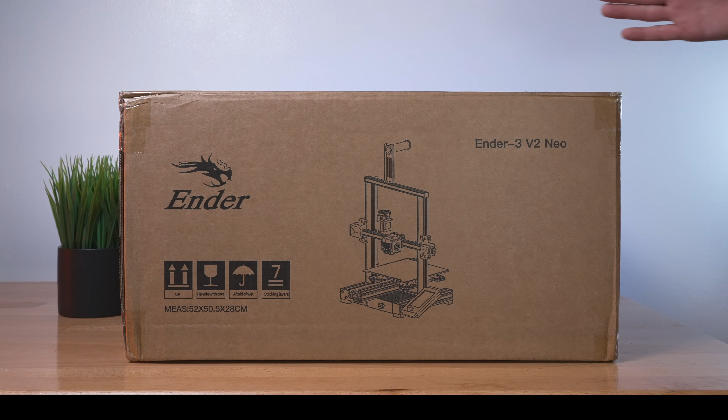Hey guys, today we're going to be checking out a new printer from Creality, the ever so popular Ender-3 version 2, but now in this Neo iteration. Creality's been pumping out new little updates to their existing line, and the Neo version brings all the little upgrades you would want. In this video, we're going to unbox it, set it up, and do some prints. Hope you enjoy it. Let's get started.

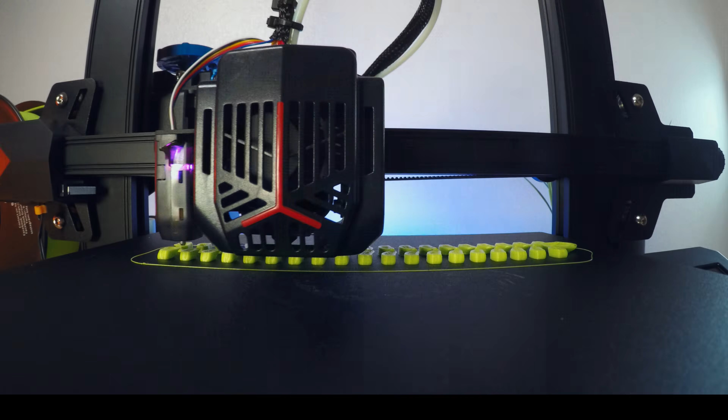Alright guys, I'm pretty excited to check out the Ender-3 version 2 Neo, and I've been a huge Creality fan for a while now, ever since their first Ender-3 printer. So this is the box it comes in. We've got a picture of what the printer looks like, the dimensions of the box, and the shipping label says 8 kilograms, which is about 16-17 pounds. Let's go ahead and open it up.

On the top we can see that it's all packed in this dark soft foam. We've got our documentation, the quick start guide, and some warranty cards, things like that. Everything is packed very well, so I'm just gonna go ahead and pull things out one by one.

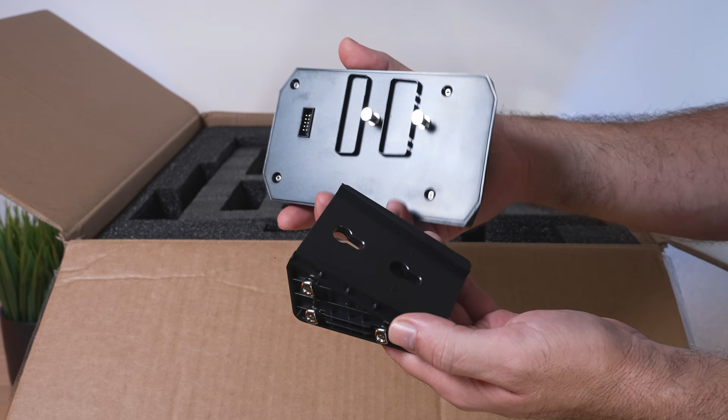The first thing that sticks out here is the screen, and this is the same kind of screen that the Ender-3 version 2 has. It's not a touch screen, it's a rotary kind of operation with a click. We have this bracket that unclicks, and that's how you take the screen on and off, and it plugs in here in the back. I'd like to see smaller bezels in the future, but I think at this point they're just using the design they have and upgrading it slowly.

Here we have a bag of accessories and lots of different things, and we'll go through this in a little bit. We've got our power cable, US type, and a little spatula - it's not sharpened, so these are quite useful to stick between the nozzle and the bed to, you know, maybe get a booger out or something. Alright, so we've got one layer here that comes out.

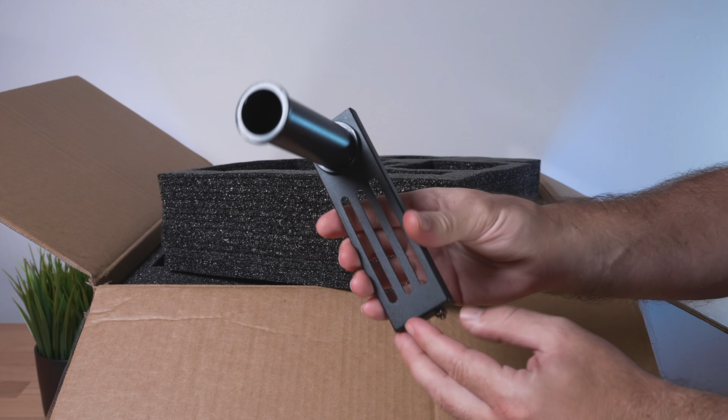Well, actually we do have a spool holder still in there, and yeah, they're just using the old typical spool holder that goes on top. Honestly, I wish they would include the side spool for this one, but the V2 Neo here still comes with this top mounted, pretty simple spool holder.

Alright, so yeah, that's the first little layer there. You probably can't see too well, but everything's nestled very nicely. We've got the gantry here, which is the upper portion, and then the base underneath. This is a pretty simple printer to put together, as we only have a few parts to connect.

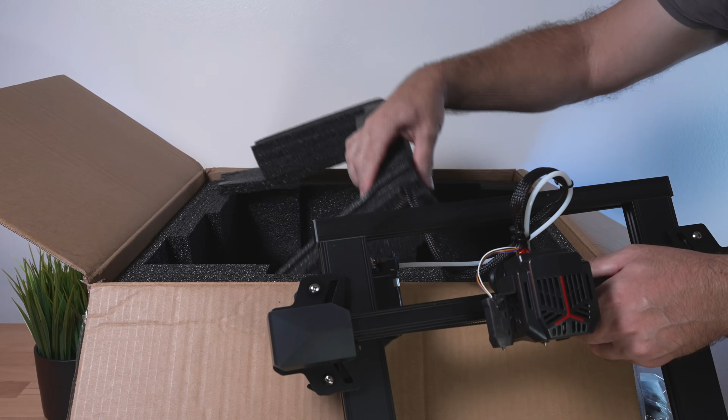I'll go ahead and pull out the gantry, and sure enough, it is tethered to the base, so we'll have to pull them out together. But it does all come out quite easily, so I'm gonna move them out of the way for a second. You guys can see that's everything for the box - very well packed and lots of good protection on all corners.

Alright, I'm gonna go ahead and flip this thing around. On the back here we have the power supply, all nicely shielded. On this side we have a cover where our main board is, and we'll pop these little bolts off and see what's inside. On this side we have a storage bin, which is really nice.

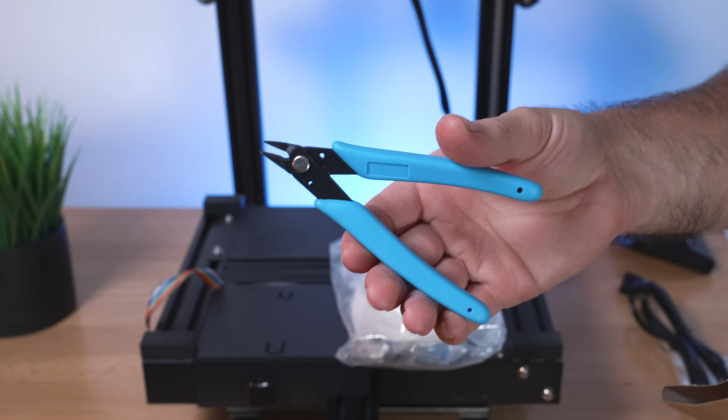Let's go ahead and see what's in this bag. We get some pretty nice snippers, and on the side of this box we have a clean out needle that's taped to it. We get some zip ties, a knob - this is for the extruder, and you guys can see it has a brass insert there, and this is used for indication of flow, and also you can turn it manually, pushing the filament in and out of the extruder.

We also get a coil of filament. It looks like PLA, and I'm not too crazy about these because they're all tangled up, but you know, something to get you started with.

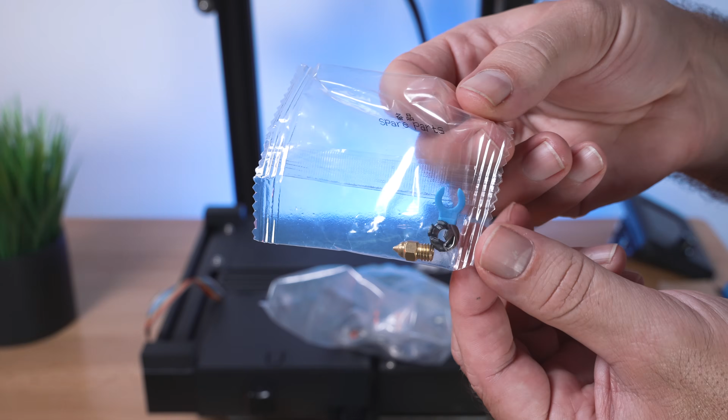4 large bolts, which are used to connect the gantry to the base, and these are M5 45s. We get some spare parts, looks like a 0.4 nozzle, a coupler piece, and also a little clip to hold the PTFE tubing in. You also get a USB adapter to micro SD card, and the little SD card's in it. For the last baggie, we have some tools comprising some Allen wrenches, a couple open-end wrenches, and a flat screwdriver.

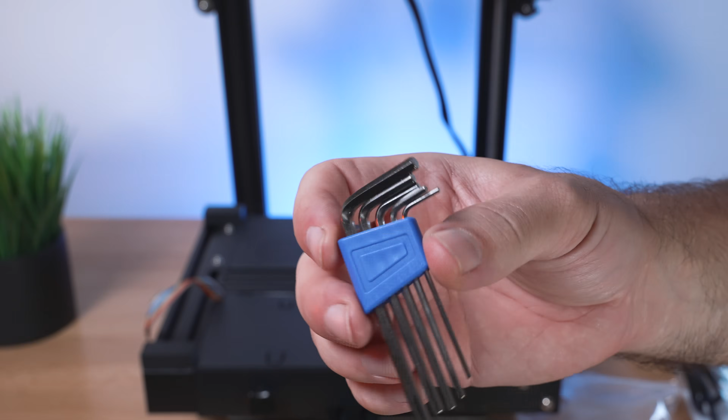So let's go ahead and grab our Allen wrenches, and yeah, really nice how they have them organized like this, not just scattered all over the place - this is a nice little touch. We'll go ahead and undo these 3 under here, and there's one on the other side for this cover, and now it should just pop off. Sure enough, it does, and we do have a fan connected to it.

With our board and everything else underneath, let's take a closer look.

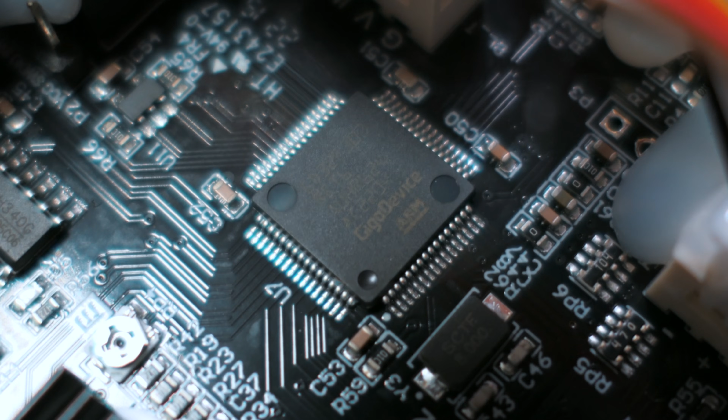So you guys can see we have a Creality version 4.2.2, which is their main board that they use for the Ender. We've got stepper drivers integrated into the board with little heat sinks, and also a 32-bit ARM processor. You can see all the wires are managed and routed out through this cutout here, and there's a protective shield for the wires.

So yeah, pretty typical here for Creality, and everything looks really good. I'm going to put this lid back on, and we'll flip it around and start the assembly. If you guys notice here on each corner of the printer, we've got these really large rubber feet, which will help with noise and vibration.

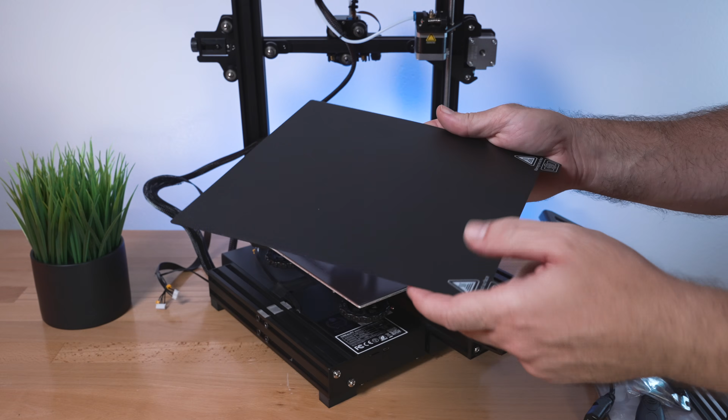All right, so we got it flipped back around. First thing that stands out is this build plate, and it's a flexible sheet, like a thin metal sheet that flexes, and I really like these. This coating here, I think it's called PE, and I prefer this kind of build plate over the normal mats or even the glass beds. I feel like these are much easier and better overall, and there is a magnetic that this magnetizes to, so I'm going to leave this off for now.

As you can see, pretty much the printer is all assembled. All we've got to do is connect this gantry here to the base, and we're going to have these 4 bolts that go through the bottom into the channel.

Let's go ahead and get those out. And they do give you an extra one.

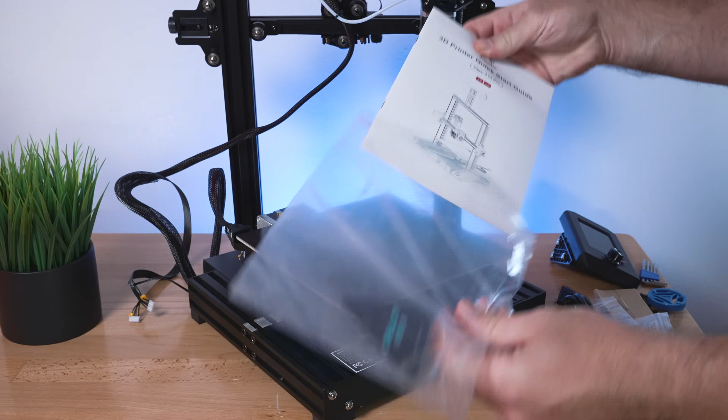So I guess we can go ahead and see what's in this manual. We get a little thank you from Creality, our warranty card, and then the quick start guide, which is a really nice one. We have all the parts that are included with this printer, and the installation is only a couple pages and very simple.

So just connecting the gantry, then the spool holder, and then connecting the wiring. By the way, here's all our parameters for the printer. So yeah, this should be very simple guys. And if you're just getting started with 3D printing, this is going to be great for you because it's quite simple compared to what it used to be like.

Let's go ahead and start putting this thing together. Simple as grabbing the gantry, we're just going to set it over these sides here, and you guys can kind of see it's machined out there, and it's literally going to sit right in that spot.

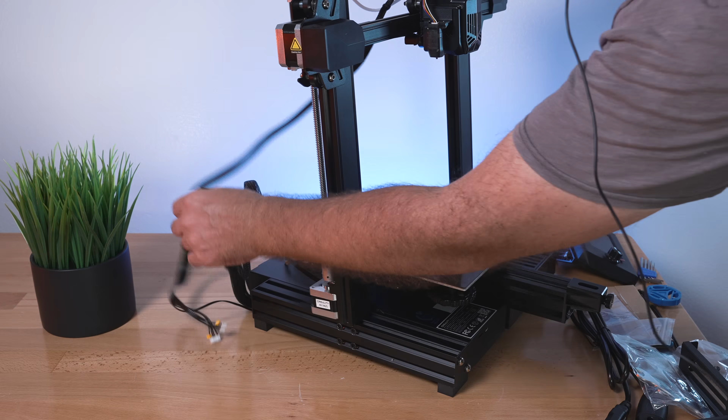Now when you put this down, make sure that your cables here are not tangled and they're happy, so you might have to twist this around to untangle it. Yeah, I think mine's good right there. But yeah, simple as that.

We're going to grab the bolt we need. There's no really easy way of doing this, but we can kind of lift one corner and then put the bolt through there. However you've got to do this, you can put it on its side or maybe off the edge of the table, whatever's easier for you.

Just get these bolts in there, and we're going to use the largest Allen wrench to run them down. Now we're not going to tighten this, I'm just going to get them close, and we're going to do the other side exactly the same way.

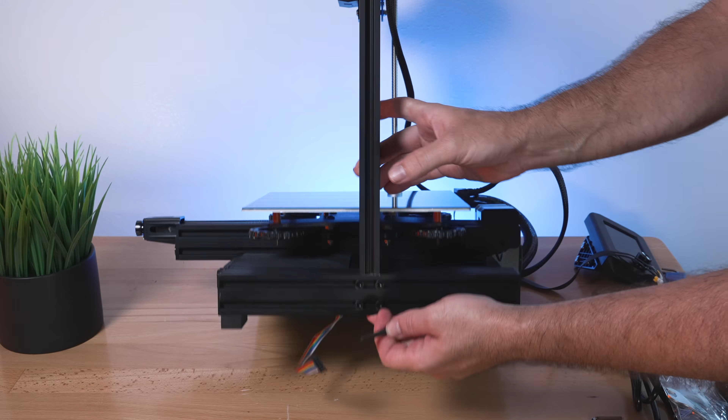Run them down, but we're not going to tighten these either, and the reason for that is quite simple. If we go to the back, you guys can see we have one lead screw here, which connects to our x-axis, and we're going to want to bring that all the way down. The reason for that is because we want the space between these rollers here to be as close as possible on the bottom. Since we are spending most of our time down there, we want to get that part as close as possible, so just go down as much as it goes.

So now we're going to go back underneath and completely tighten these up on both sides. All right, and that's pretty much it.

Another thing you might want to check is if your printer is sitting level on each corner, to see if it's moving around. As you guys can see, mine is nice and solid. If you can see on the side, there's 4 bolts. If yours is wobbling a bit, go ahead and loosen them on each side, let it sit flat, and then tighten them back up.

So I'm going to go ahead and just check mine, make sure they're tight. They're a little loose, but not too bad, which is a good idea to go back and check them anyways, as they do loosen up after they get assembled. Also underneath the printer, we got 4 bolts here. You can go ahead and check those, kind of snug them up. All right, and that feels nice and solid right there.

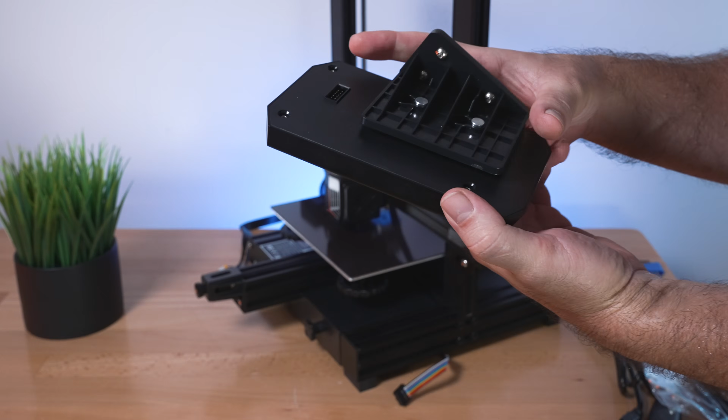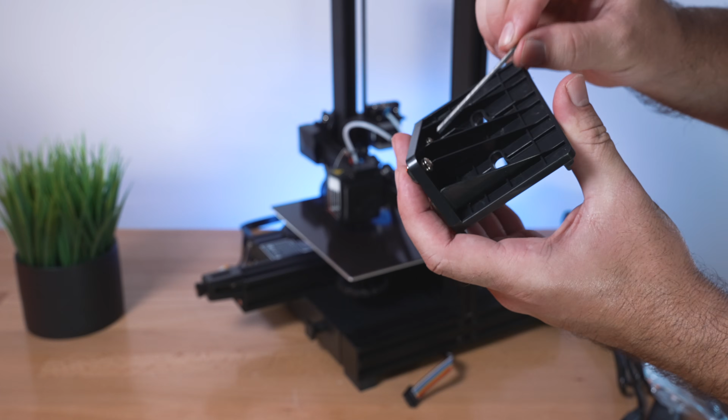So let's go ahead and do the screen next. We can see here there's a wire that comes out from the bottom, and that's gonna plug into our main screen. But before we do that, let's take the bracket off that it connects to. We're gonna be installing the bracket on the channel. There's some T-nuts pre-installed. We're gonna grab the correct wrench and loosen them all, because they're all tight. There's a bolt on one end and a T-nut on the other.

Now that they're all loose, we're gonna line these T-nuts up to the channel. These 2 here go on the bottom channel and this one on the top. Just get them to kind of jump in there. You can install this screen more forward or more back, whatever you want. I'll try to flush it with this fascia. So about right there. With these, you just want to unscrew the bolt and then screw it in, and the T-nut should turn into the channel and lock in.

It's a little hard to show you guys, but it's not very complicated. If you're having trouble, just unscrew the bolt and then screw it back in, and try to make sure the T-nut's lining up center on the groove in the channel. I'm just gonna unscrew it and then screw it in, and it grabbed. We got one more here, a little harder to get to. Just like that, our bracket for the screen is on.

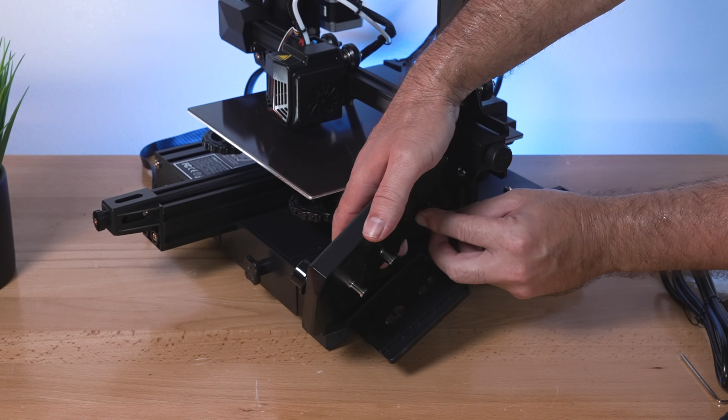Since we're over here, let's go ahead and plug it in on the back, just like that, and then we'll click it in. Now we have our screen installed.

For the next part, we need to install the spool holder, and that goes on top. If you look where our extruder is, that's where the filament goes in, so it has to come from the spool holder down into here. The spool holder mounts closer to the lead screw here.

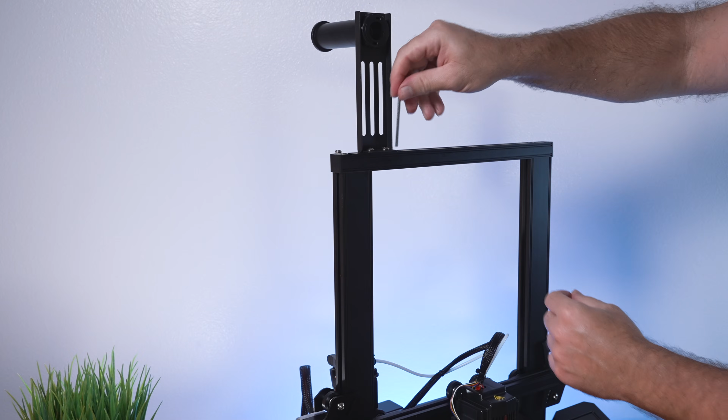We're also working with T-nuts, so let's loosen the bolts. Spool holder going to the back, and I like to go as far as possible to the edge. Same thing here, we're just gonna unscrew it, then screw them in, and the T-nut should turn and lock in. Same thing for this one. And there we go, our spool holder is installed.

The last thing left to do is plug in our wires. We have two larger plugs, which is an X motor and an E for the extruder, and they are labeled with these little yellow tags. Our smaller plug is our X axis end stop switch, which is over here.

Let's go ahead and install the motor plugs. The E will go on the extruder right here, and the X plugs underneath the motor, just like that. Our X axis end stop switch plugs in under here, a little harder to see, but right under there, and that's pretty much done. The last thing we got to plug in is our Z-axis motor, and this wire just comes out here from the bottom, and we'll go ahead and plug it in just like that.

Pretty simple. Now the only issue here is that this wire just kind of falls down, and that's not good, so we need to fasten it right here. There's a little slot on the extruder that we can use a zip tie on. Go through there and then around this wire and zip it up, that way it doesn't fall down onto our bed.

And yeah, simple as that, guys. This part is finished. We can also go ahead and install this knob, which goes right here on top of the extruder, and it has a flat spot where it lines up. So it should just drop in. There we go. Very nice. So you guys can see, you can turn that.

And also it's like a nice little visual there as the extruder runs. And as far as assembly goes, we are pretty much finished with that. But there are some important things that we need to do, and that's to check our rollers and belts. Make sure everything's running smooth and true.

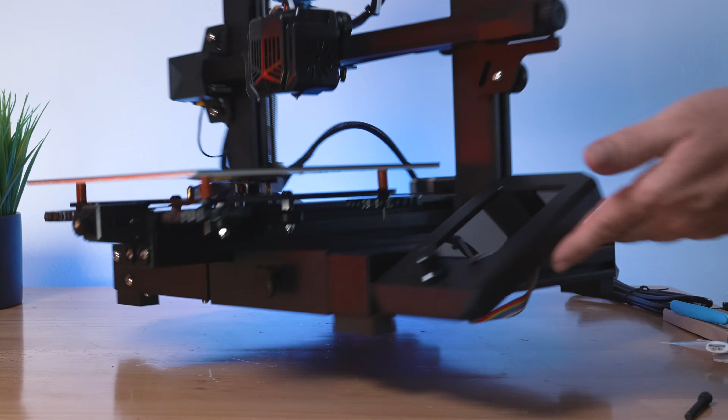All right, so starting here with the bed, what we want to do is check our rollers, and you guys can probably see we got two rollers here, and those are stationary, and the two on this side are adjustable. And so what I like to do is kind of stick my hand in there and turn the rollers. So what you want is a really slight drag, and actually guys, my bed here is pretty much perfect.

And so they include this wrench here that you can turn the adjustable eccentric nut to tighten and loosen the rollers. So I tightened my front one up just a little because it was super loose, and the rear one is perfect. So the point here is you want the bed not to wobble around or have any play, but be as loose as possible on the rollers. That way when it rolls around, it's really smooth. So if you have a really nice smooth back and forth motion, then you should be good.

Now another thing that can contribute to that is the belt. So you can see on the top there's a little look through where you can see how the belt is doing. And also we have an adjustable knob here to tighten it and loosen it. So you want your belt to be looser than tighter, but definitely not too loose, because if it's too loose, it'll have flop. And if your belt is not running true, you can try to loosen these bolts on the bottom here and adjust it. But for this, you'd probably have to shimmy it up and whatnot else, because there's no actual adjustment.

Now, as far as the back is concerned, we can't even see anything here, not even underneath. So in order to see this at all, you just have to take it apart. And there's a little pass through here, which reveals the end stop switch, and even then we can't really see how well the belt is going over that gear. But according to what I can see, it seems fine.

The whole point here is that make sure your bed is really smooth. So I'm gonna put this back on, and we're probably going a little bit in too much detail here, but yeah, adjusting is one of the main things you want to do and spend your time on when you get your printer.

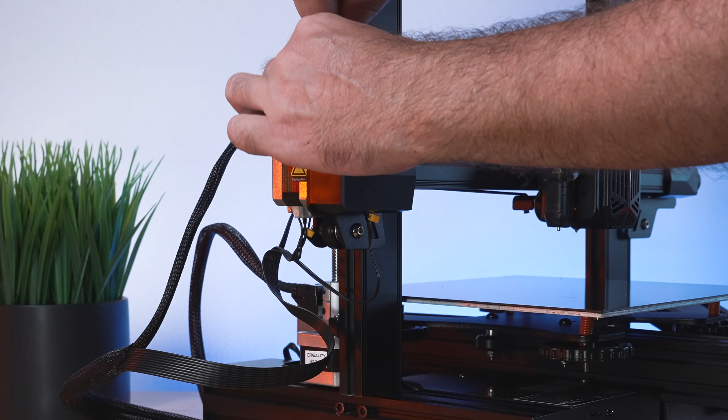And actually guys, on this side, there are a couple bolts that do remove the cover, and maybe we should do that real quick to see.

So there's one on top and one on the bottom, and the whole thing just pops off, and we can see the belt. Sure enough, it's running really true right in the middle of the sprocket, which is good to see. Now we can't see the other side at all, and I don't really see how you can take that on or off, so we're just going to go with the way it is. I think it should be good enough because it feels pretty smooth overall.

Be careful when you tighten it with these knobs, as you can't really feel how much tightness you have, so you kind of have to pull on the belt when you adjust that. All right, let's put this cover back on, and we're good with the x-axis.

Now there is one more thing you could adjust, and that's these wheels here. On mine, they're a little bit on the tight side, so we can go ahead and loosen them up just a bit. The adjustable eccentric nuts are on the inside here. We'll start with this one, and we loosened it up just a tiny bit.

You want to keep these tighter than looser, because the Z goes up and down really slow, so there's not too much movement going on, so it's okay if they're a bit tighter. Now what you don't want is for it to be too loose, where on this side you can bounce around—which we're not, it's nice and tight. Because we only have one Z-axis lead screw, this side is more vulnerable to movement, so for this printer it's better to be tighter than looser.

Yeah, we are pretty loose, and you guys can see our Z-axis moves really good, and I can just push it up and down. This is usually a great indicator that everything's adjusted well, it's all aligned, and nothing's binding.

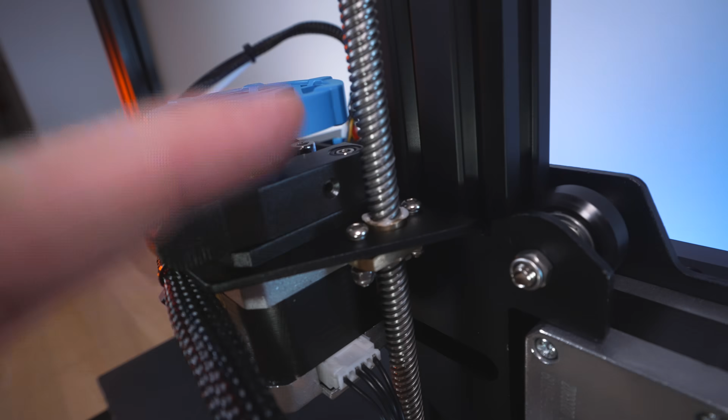This is our x-axis motor, and that's where it plugs in. The brass bushings, we grease the lead screw. Going down, we got the coupler with the motor for the z-axis. On the other side here, there's not too much, just the rollers, and then our adjustable knob here for the belt tension.

The frame is all metal everywhere, so that's nice to see. Going down to the bottom, we can see our cable that comes out from the bed, and it is strain relieved nicely, and all the wires are on these braided protectors. Very nice. Also, we can see all the channels have end caps and our large rubber feet on 4 corners.

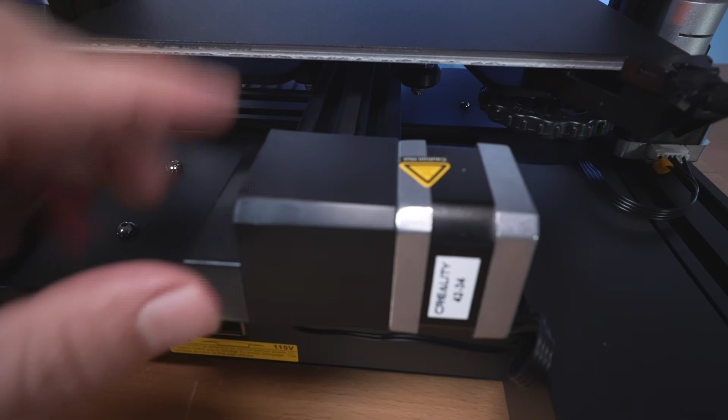On the very back here, kind of sticking out, we have the power input port. It is fused with an on and off switch. This is our y-axis motor, and it's all covered up here. The belt, the end stop switch is right on top here, and all these wires here are already pre-connected.

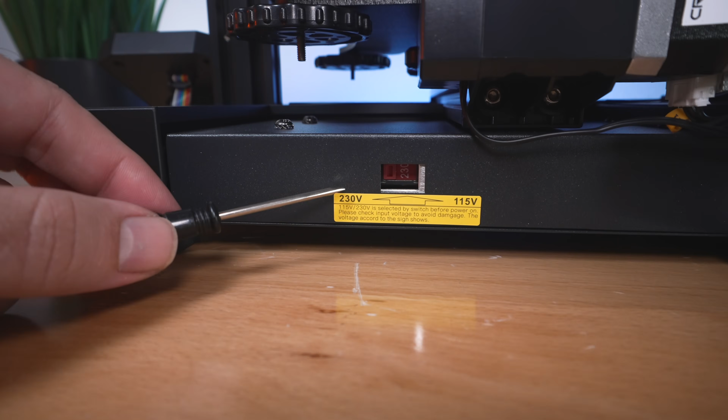And probably the more important thing is back here, which is the power voltage switch from 230 to 115. So depending on where you live, you want to switch yours to the correct voltage. Mine's on 230, but I need to go to 115. So let's grab our little flat screwdriver and switch that over to the 115 voltage.

And you guys definitely don't want to forget about this, as it's quite important. If you have it on the wrong voltage, you could damage your printer. So yeah, I like the overall design. Very low profile here on the power supply. Nice end caps, just looks really good and well built.

And going up from here, we can see the back of our hot end, and you guys can kind of see that we have a silicone sock over the heat block, and that's our tip there, and the CR touch over there. Going back to the front on our hot end assembly, we can see the wires that come in. We got a PTFE tubing going from the extruder to the hot end, and this wiring here, then our main wiring for all the cables.

And you guys can see we do have a clip in there on the coupler for the PTFE tubing, and we also got a wire here that comes out to our CR touch for the auto bed leveling.

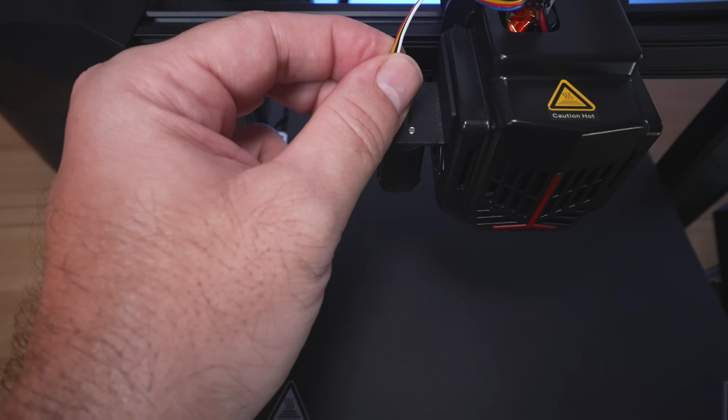So the cover on the hot end is quite interesting looking. We got this red accent, it is all plastic, and we've got a lot of vents for cooling. So this is our parts cooling fan under here. It is a vertical blower duct coming out there on the bottom, blowing right under the tip. Our heat break fan is inside there, and it's actually quite large.

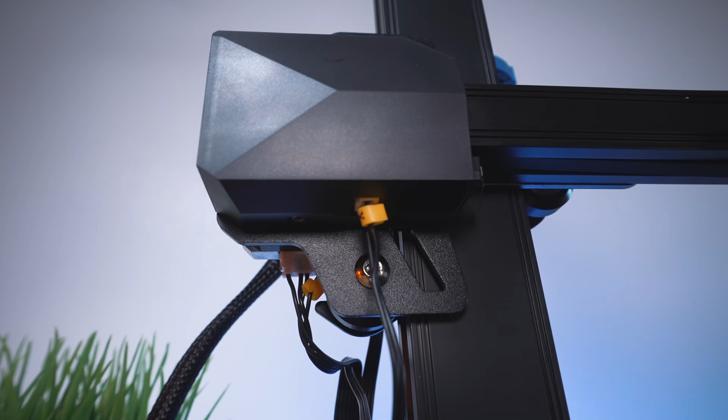And then on this side, we have the CR touch. So going to here, you guys can see that this cover here is all covered up, and we took it off earlier. Our end stop plug plugs underneath, and that's the switch here. So it looks pretty nice. And on the other side, we have the adjustment for the belt here, also completely covered. But a very nice clean design.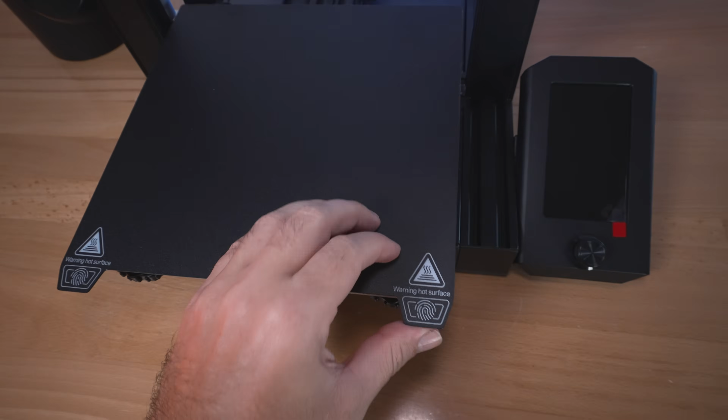Going down to the bed, I really like this sheet that they included that's flexible and it's magnetic. This makes it a lot more enjoyable to 3D print, as when you're done, you can just pull it off, flex the build plate, and the model will pop off. Plus, you don't have to wait for the build platform to cool off. Right when you're done, you can take it off, set it on the table, and it'll cool off really quick compared

to like a glass bed. So yeah, very happy to see this. Hopefully it works great and the prints will stick and pop off easily.

So going down from there, you guys can see we have the magnetic sheet under that, and then the aluminum part, which is the heated platform, and the elements are underneath, so it is not insulated. But for this size bed, it's not that big of a deal.

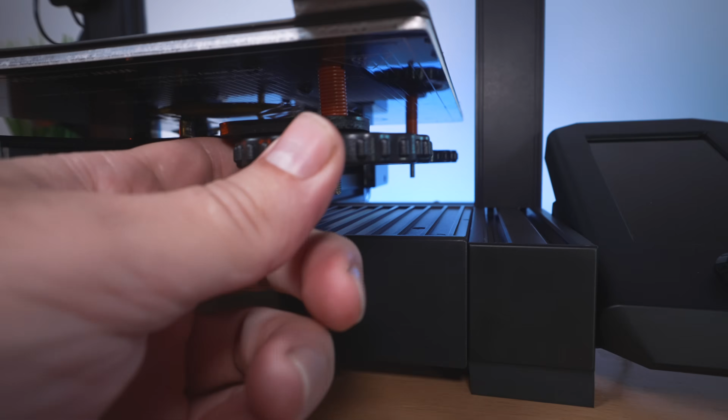We got the frame, pretty thick, quality orange springs, adjustable knobs here to level out the build plate. There you guys can see our adjustable eccentric nuts on this side for the rollers on the bed, and then the other side is stationary.

The Y belt, and they do have a cutout here so you can see the roller, and this is where we tension it. Over here we have some kind of official Creality Better Filament Plan sticker, QR code, and the parameters of the printer.

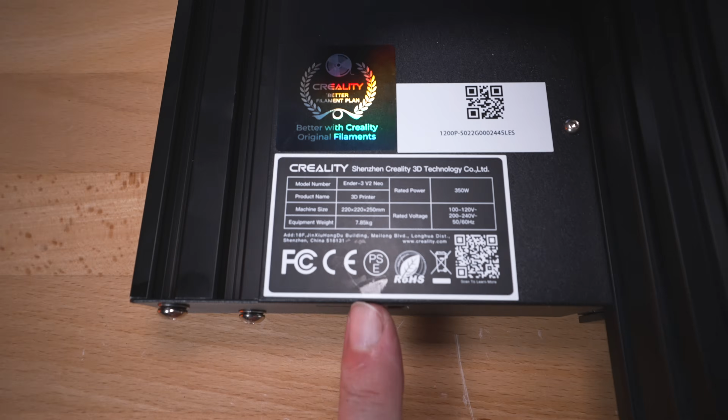Right below that we have a couple ports, one for the micro SD card, and the other one is a micro USB plug if you wanted to connect to your computer.

Very nice clean design. Going this way, one of my favorite parts of the printer is this really large storage box. It completely pulls out and has a little hidden piece here that separates from the main one, goes underneath the channel. So this is great, and it clips in there, very useful. Really like that. And as we go from here, we can see our display with the rotary knob.

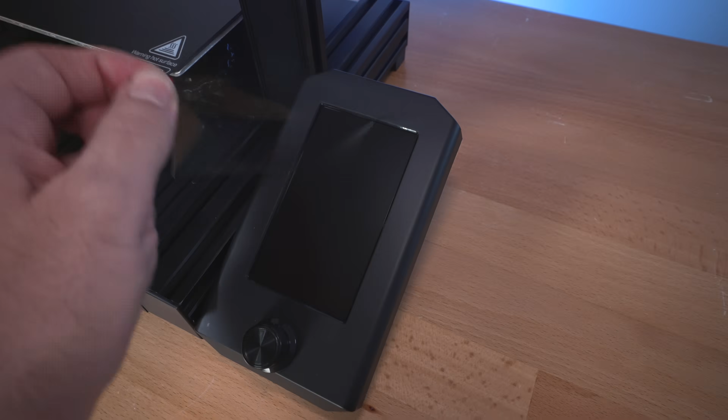Let's go ahead and peel this protector layer. Underneath here, you guys can see this is how we mounted it. Plugs in here, cable comes from the bottom, and not too much more to see on this side. And on the other side, also not too much to see here.

But yeah, overall a really nice looking printer. The only thing I wish is that the spool holder would be on the side, but you could upgrade to that, or even do a little mod where you take this off here and print out a little bracket that hooks up to the side, and the spool will kind of go to the side there. So other than that, very well built printer, and I'm pretty excited to power it on.

All right, so I went ahead and plugged the printer in. Let's go ahead and hit the power button. And it does power up. You guys see it actually boots up real quick.

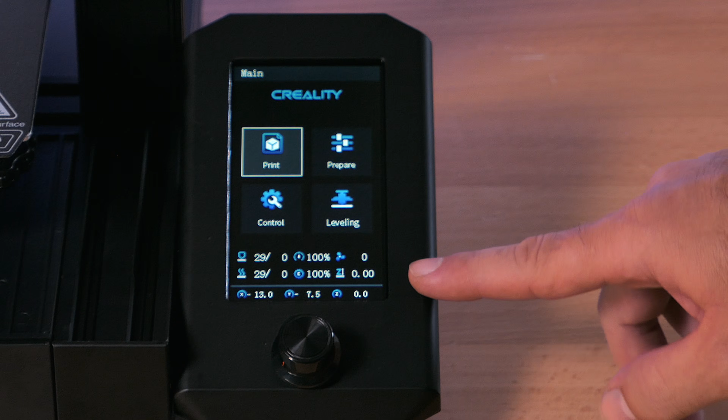So as far as the UI, it looks pretty similar. I don't really see any difference at this point. We got print, prepare, control, and leveling. And then down here we have all of our constant information about the different parameters.

So let's go ahead and click on prepare, and we'll click on preheat PLA. So it's going to go 200 on the nozzle and 60 on the bed. It all appears to be working there.

Also let's go to auto home and make sure everything works with our motors and end stop switches. So click that. The X is good, the Y is good, and you guys can see our CR touch there, probing the bed.

All right, so everything works, and our bed is getting hot, and our nozzle is already at 170. Pretty impressive how quick the bed heats up, even though it doesn't have insulation.

So the first thing we want to do is level our bed. Because this printer does have adjustable springs here, we need to go ahead and level the platform out first. Unfortunately, Creality doesn't have a way to make this more simple than it is.

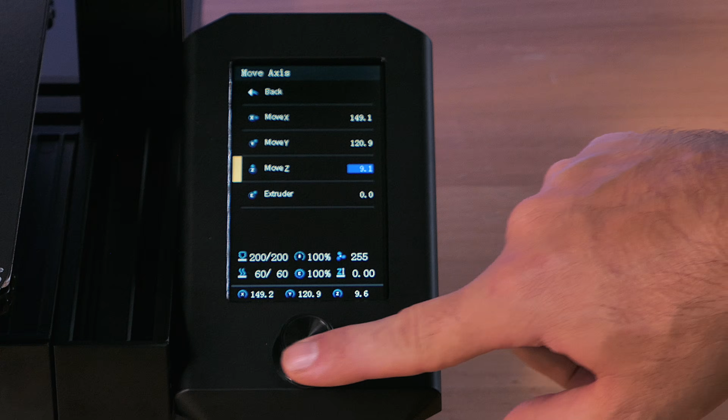So what we need to do is go to prepare and then auto home, which we did, but if you have to, auto home again. And if you guys notice, it kind of raises up, so we're off the build plate quite a bit. So we need to go to move axis, and if we look here, we are 10 millimeters too high, so we have to lower that to 0. This is the confusing part, because if you don't do this, you're not going to be leveling it correctly.

So once you're at 0, now we can start the leveling process. But before we can do that, all our steppers are locked, so we need to disable the stepper motors, which we'll click here, and that's going to let us move it around.

Now, the only thing about this is that you're going to have to be very careful not to push down on this, and you guys saw how easy it goes down. So this is a little bit tricky. Try not to put any force down, only side to side there.

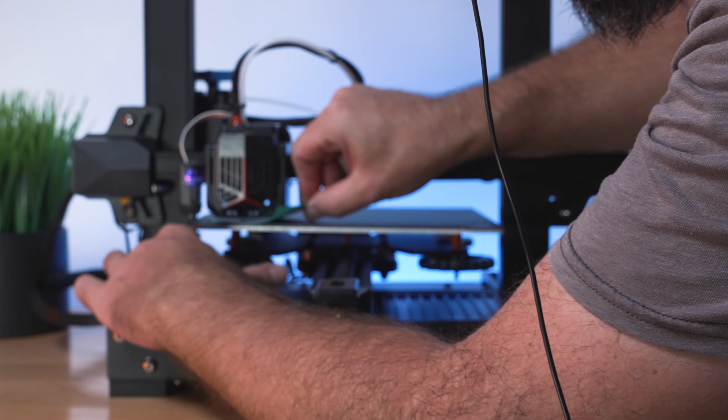And then we're moving our bed also. So let's go to this first corner here. All right, and we'll go around. For now, it looks like I just need to go up mostly on the 4 corners. All right, so back to the front corner here.

Now we're going to be adjusting a little more precise. You want to go around at least 3 times or so and get it pretty close, because as you adjust one, the others kind of change. All right, so I am pretty close now. As long as you get it close, you should be good enough. Then we're going to click on this level button, and that's going to initiate the auto leveling.

And our bed leveling is complete. You guys saw the nozzle lowers down to where it needs to be. And now what we can do is set our Z-axis offset.

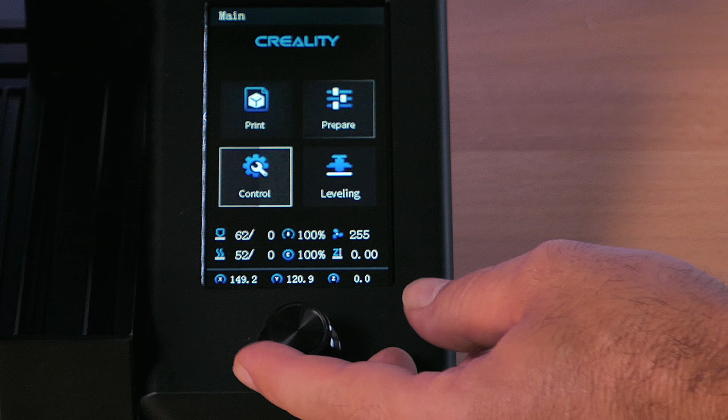So if we go to prepare, and go Z offset, here we can adjust. I gotta go down, so I'm going into the negative until our nozzle has some friction between the paper and the bed. There we go. So I'm starting to see some friction here. So I need to go back up. All right, so it looks like about minus 2.70.

And you can adjust this when you start printing up or down. But yeah, this offset is going to be universal for this hot end setup. So no matter how you change the build platform, level it up or down, it'll always be minus 2.70. So yeah, because of the CR touch here, it goes off of that. And that pretty much concludes our bed leveling.

So let's go ahead and auto home it again. And we're pretty much ready to print. But before we do that, let's go ahead and preheat the printer again. Looks like it turned that off.

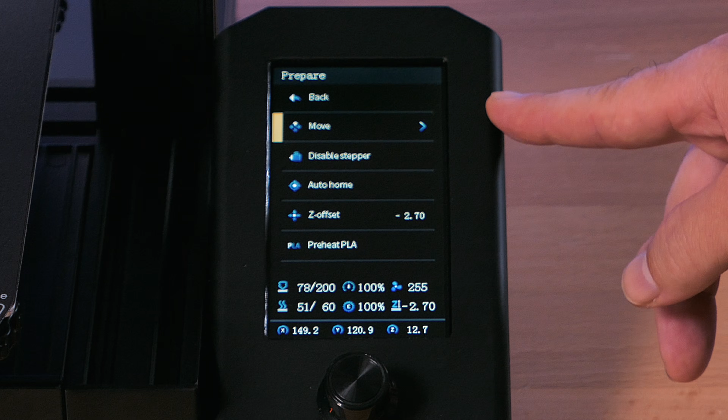So preheat PLA. Yeah, the menu is quite simple, guys. We have print here, that's going to read the SD card. Prepare is where all of our useful functions are, like move, disable steppers, auto home, Z-axis offset, preheat PLA, preheat ABS, and cool down.

Go back. Control is going to be our temperature control, motion control, configuration, store configuration, read configuration, and reset configuration, and info about the printer. And then our last one here is the auto bed leveling.

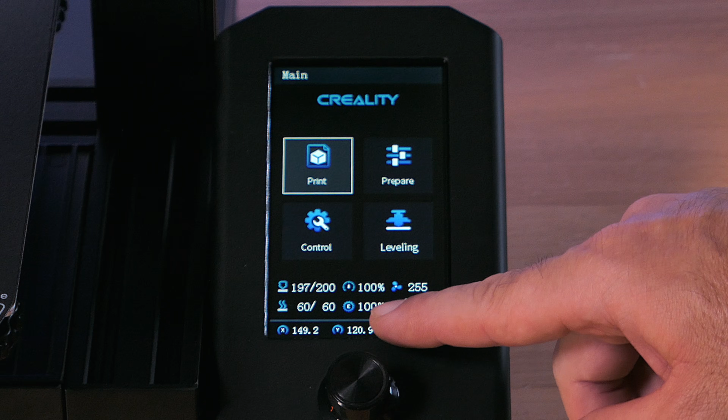So yeah, it's pretty simple overall. And down here we have dedicated information. We got the hot end temperature and the target, the bed temperature target, the flow rate, the extruder rate, fan speed, Z-axis, and on the very bottom we have the X, Y, and Z positions.

So let's go ahead and put in some filament, cut it at an angle so it's easier to feed. And it's gonna go up here on the spool holder, and then from there down through the extruder inlet there, hopefully you guys can see, and we're gonna just press on this knob to release it, and then kind of go into the teeth, and then once we go there we can use this knob to push it through. But yeah, we're literally pushing the filament through the PTFE tubing and then out the hot end.

And we'll go ahead and purge that. So we got red coming out, perfect.

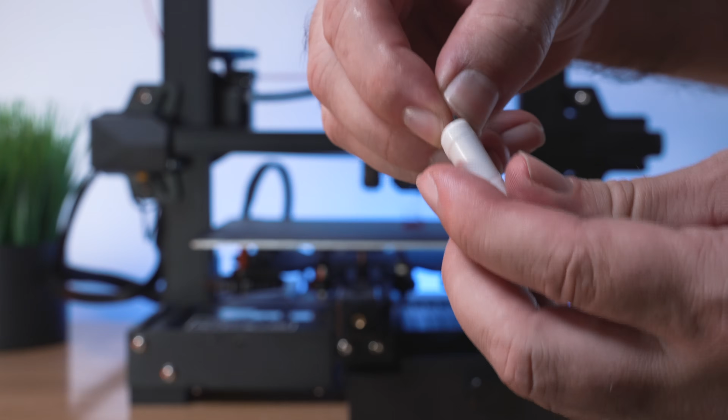So let's grab our micro SD card. And by the way, it is at 8 gig and it plugs in right here upside down. So now we can go and click on print, and we can see that we have a couple test prints included with the printer. So let's go ahead and start with this tuzi one.

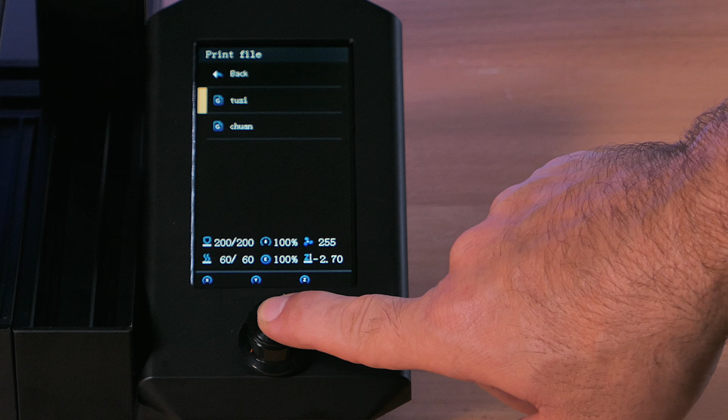Go ahead and move this boogers out of the way. Start. And sure enough, we can see a preview here of what our print looks like. And I think this is the new part of the UI that it's able to show you what you're printing. Well, that's pretty cool. So let's confirm.

And it starts. So unfortunately, it doesn't show you the actual preview while you're printing, just initially when you first start.

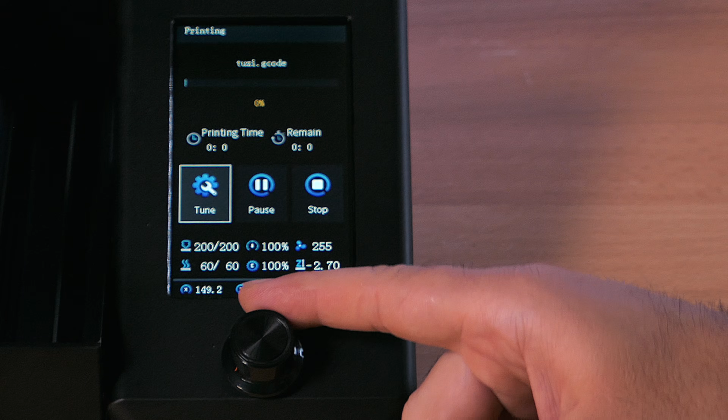Got some filament there. But yeah, let's hope our offset is good. And we can go to tune and Z-axis offset just in case we need to adjust it up or down. But it appears that we don't need to do anything because it's perfectly between the nozzle and the bed.

All right, well, that's pretty impressive, but I think it does need to go up just a little bit. It seems like a little too close, so I'm gonna go up. Okay, yeah, that feels a little better, but yeah, we're pretty much perfect off the build plate.

And as we do print, we do have a different menu here. So on the top, it shows us the file we're printing, the progress bar, it's at 0 right now. How much time passed since we started, 1 minute. Remaining and still calculating.

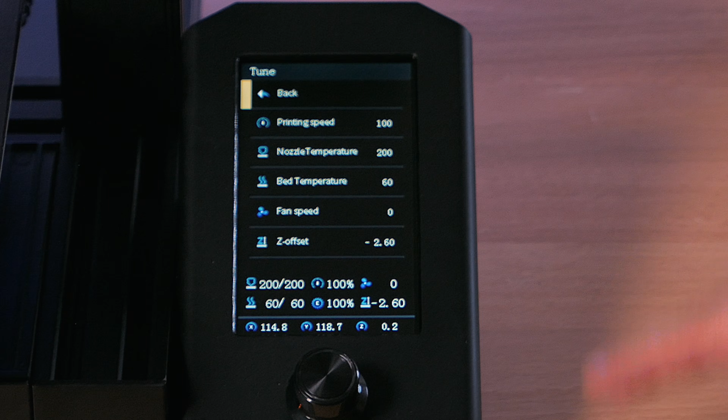And then we got hot buttons, tune, pause, and stop. So in tune, we can adjust our printing speed, our nozzle temperature, our bed temperature, the fan speed, and the Z-axis offset. And obviously you can pause and stop the printer if you want to. And down here we got all our general information that always stays down here. So yeah, very nicely laid out and easy to understand.

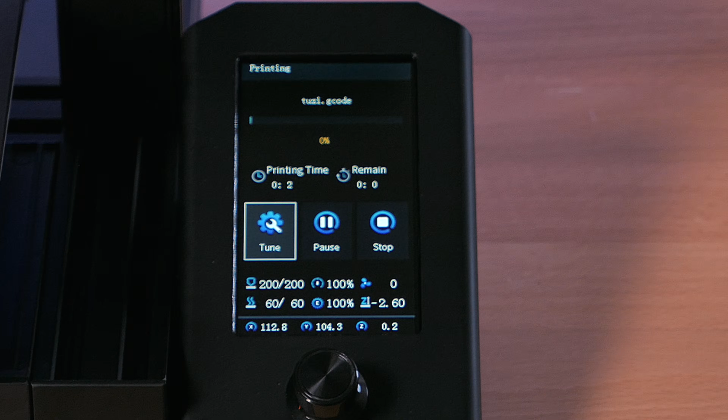So the printer is ultra quiet. I'm going to bring my microphone in. No motor sounds at all, and the fans are actually on the quieter side.

So yeah, so far everything is looking really good. And it looks like our tuzi is sticking to the build plate, no problem. And we're 4 minutes in, going up and up on the layers.

Alright, so we went ahead and printed out both of the models that were included with the printer, and I went ahead and changed the filament to blue after the rabbit there. So the other print, as you guys can see, was a little benchy.

Now if you look at the screen here, it's pretty darkened and it has an auto dim feature, so if we just touch the knob here, it'll come back to life. And so for the benchy, it only took 1 hour and 46 minutes, and we can just click on confirm and it'll go back to the main menu.

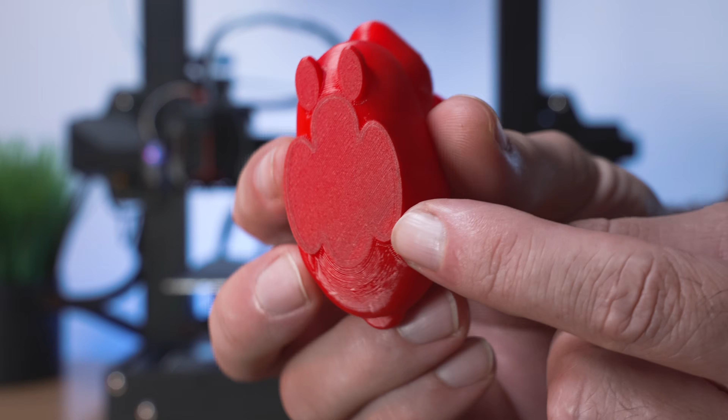And by the way, this is what the bottom looks like. It appears that we didn't purge it enough. We got some kind of darker color there, I guess from factory testing. But yeah, looking good, and the bed stuck really well.

And speaking about that, the benchy is still stuck on there, and the bed is completely cold. I like how they have 2 tabs on each side, so you can choose any corner to pry it up with. So let's see what happens.

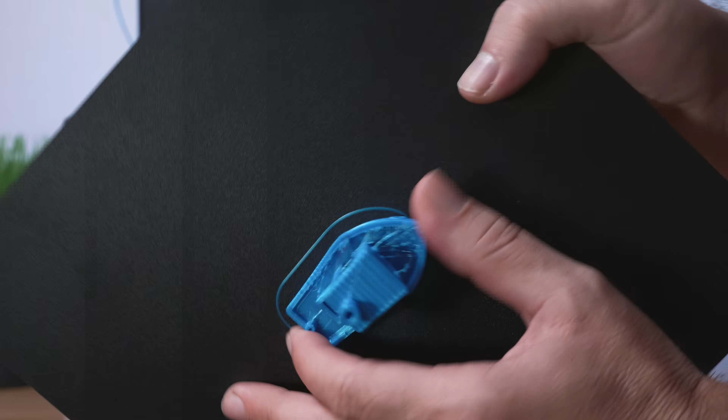Okay, so it's still stuck on there, which is cool because that just tells us that the texture here grabs the filament very well. All we gotta do is flex it, and the benchy does want to come off. So yeah, very easy. So far this thing is performing excellent.

And also on the sheet, I noticed when you put it down, you can actually still move it around by just pushing on the corners. It does magnetize, but not enough where you can't move it.

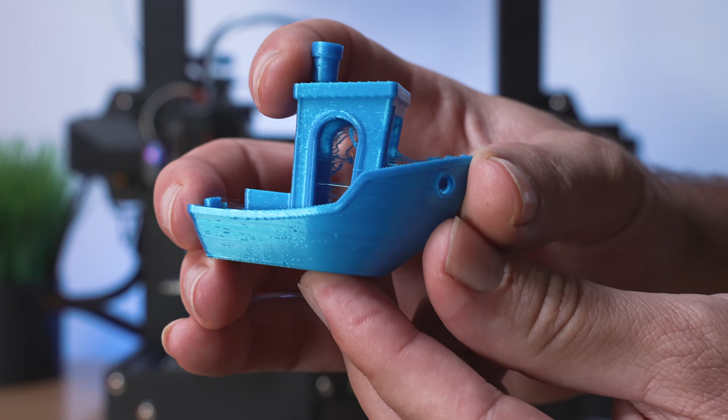Now the benchy is a different story here, guys. This doesn't appear to be sliced very well, or we had other issues, I'm not too sure. It looks like maybe just bad slicing and possibly not good filament either, maybe. But you can see that there's a little bit of under extrusion here and there. The layers are uneven, and actually we do have some miscoloring, so this could be because of the filament. I'm not too sure, honestly, what to think about this thing.

Yeah, and lots of stringing for some reason. So not a really good benchy, but we didn't slice this print, so it's kind of hard to judge it since we don't know what the parameters of the slice are. So I think what would be better is if we sliced our own benchy, and maybe also a calibration cube.

So let's go ahead and do that. Alright, so we got the SD card plugged into the computer. Let's go ahead and open it up. So we have the 2 G-codes that were included, and also this RAR file, which is made for Windows.

And I'm on Mac, I don't think that's gonna work. Yeah, it's not even gonna work, so I can't even unpack it here on my computer. So I wish they didn't do that. I guess we can't really see what's in there, but most likely there's a manual, a slicer, and things like that. So not a problem.

So let's go ahead and open our Cura slicer, and this is what I normally use, and we'll go ahead and build a profile from scratch. So we're gonna click Add Printer, Non-Network Printers, find Creality, go to Ender-3, and we can rename it here. So we'll call it V2 Neo. Delete the Creality word so it's not so long. So we'll click Add, and these are all our parameters, which should be fine.

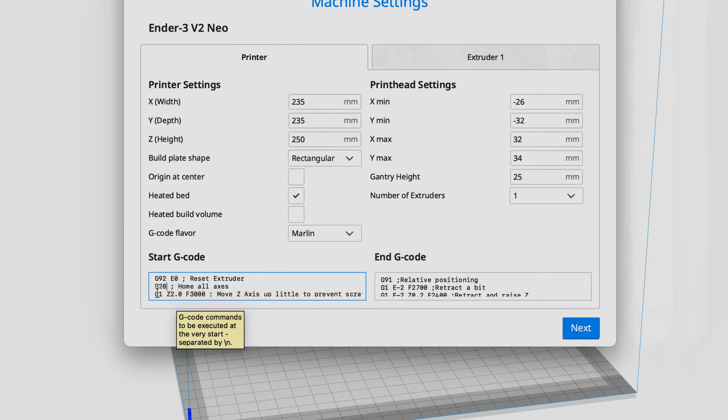So over here where it says G28, we can add G29 to home all axes since we have the CR Touch, and everything looks good here. So let's click Next, and right away here we can see the whole build volume.

Let's go ahead and throw in a Benchy. If we click on it, we can see a little menu pops up here on the side with some arrows. You can drag it, and this is the move tool - I'm just gonna push it back a little bit. So we got move, scale, and you can do it here by entering millimeters or percentage, or you can just drag these things here. And then we also have rotate.

So the more important parameters are here on top, and this is our print settings. First thing you want to do is click on these little dots right here and choose advanced. I'm gonna go through this real quick of how I change mine.

So this is our layer height, and you can change this up or down. Everything should be good there.

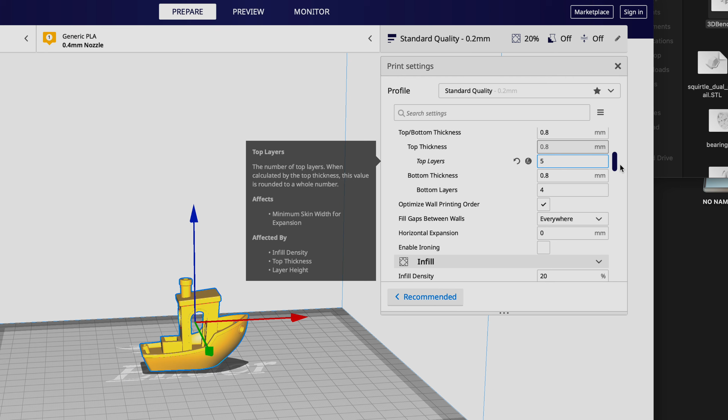Let's go down to shell. I'm gonna change the wall count from 2 to 3 - that makes the walls a lot nicer. And we'll also do the top layers from 4 to 5, which helps fill in the gaps on the top. So here we have fill gaps between walls - usually that's turned on, so you can turn that off to print faster, and you'll be able to see where the gaps are. Infill density at 20 is good.

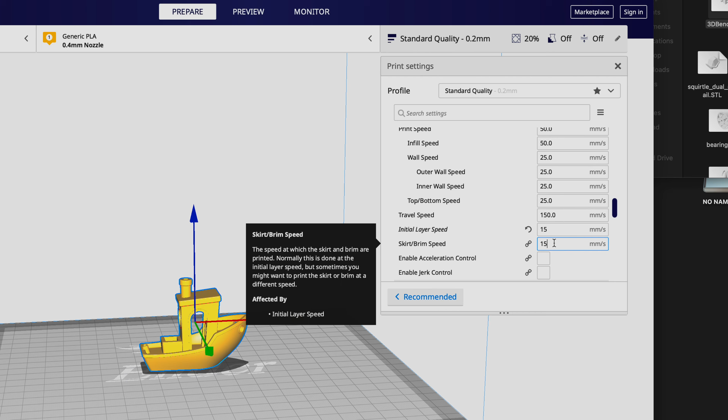Temperature 200 is good, but the build plate we want to turn to 60. For print speed, normally I use 50 for all my testing. The only thing I change is the initial layer to 15 and the brim and skirt to 15. We're going to enable retractions and change that to 6 millimeters and the retraction speed to 25. The rest should be good here.

So over here we have generate support. If you have a model that you want to put supports on, you can do all the parameters here.

Build plate adhesion - I like skirt because that prints straight to the build plate. Brim just touches the model and extends in one layer to help it stick. And then raft completely builds a raft underneath the model and prints the model on top. So this is if you're having a lot of trouble sticking, this could help, but it wastes a lot of time and material.

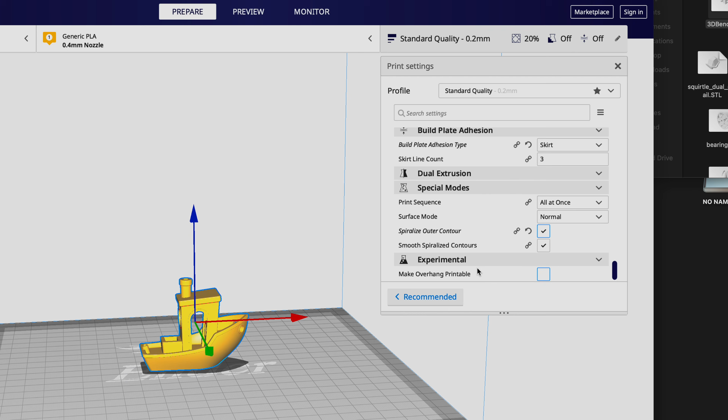Skirt is my preferred setting here, and it's just going to print 3 lines around the print and then print the print itself. We also have spiralized outer contour here - we will try this out for this printer and see how it does, but the way this works, it just prints a few layers on the bottom and then one layer all the way around. So this is good for vases or larger, simpler items that can print with one layer. So we'll uncheck that, simple as that, guys.

That's pretty much it. Now there is actually one more thing that I forgot. If we click on these dots and go to expert, in the travel section where your retractions are, it says retract before outer wall. I like to uncheck this as it does make the walls a lot nicer, especially where there's a lot of retractions needed. So you can try this out also and see if it helps your prints.

I'm going to set this back to advanced so we're not confused, and we should be good to go. So all we're going to do is click slice down here. It's telling us it's going to take 2 hours and 5 minutes to print this.

And since we got our SD card plugged in, we can go ahead and just save it straight to the removable drive. It saves here, and you can eject it and print it out.

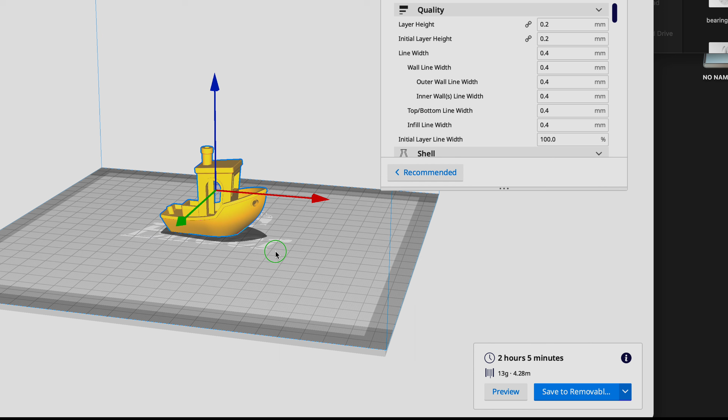But I'm going to go ahead, right click and clear the build plate and throw in a calibration cube, push it back a little bit and slice it the same way. This is going to take 37 minutes, and we'll go ahead and save this to the SD card, and now we can just eject it.

But before we do, you guys can see we got the 2 new files that we just threw in here. Pretty cool and simple, and hopefully guys, this little quick overview here helps you out.

Alright, so the benchy and the calibration cube printed out, and I have to say guys, they look really good. Now I also printed something else here, and we'll talk about that after these two. So let's go ahead and look at the calibration cube.

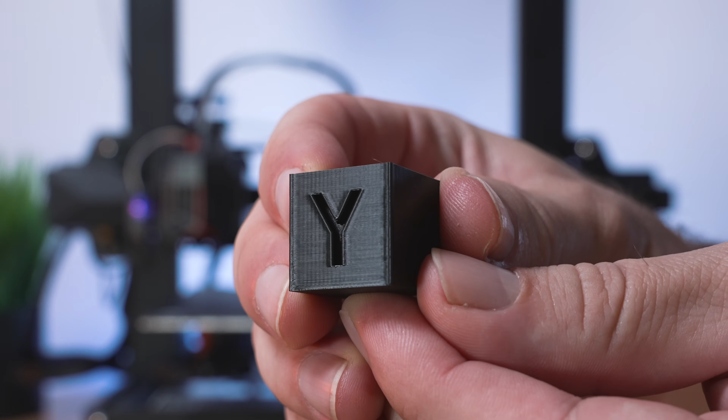So here we have the X, and you guys can see that is really clean. Trying to get you guys some different lightings. But if you see those lines, that's just the lighting, the print itself is super smooth. Practically no ghosting or any artifacts. Very nice. Here we have the Y. A little bit of vibrations and very minor ghosting. Nothing weird or bad, so looks excellent.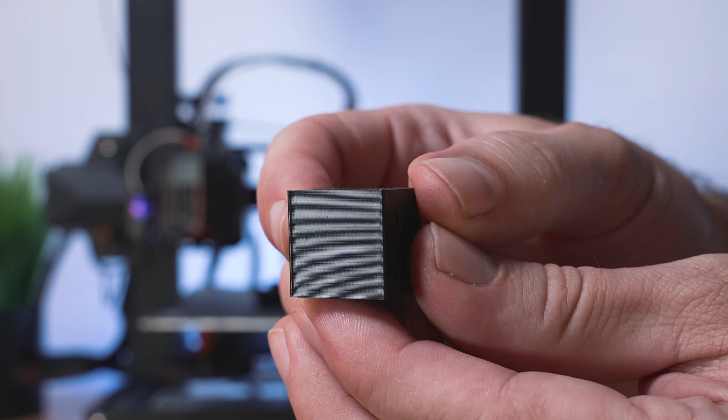The X wall and the Y wall. The top also looks perfect, and the bottom - this is the texture that the build plate leaves. So yeah, very impressive, just an excellent layer adhesion and precision.

Now the benchy is what really impressed me, and hopefully you guys can see. I guess we'll start here from the bottom. Nice textured finish, and if we look at the wall, very smooth. I'm trying to give you guys the lighting so you can see. In a certain lighting it kind of looks like it's layered, but it's not. It's extremely smooth. You can kind of tell here.

Very minimal ringing, ghosting, or any of that stuff. So yeah, impressive. The sides there look great. The overhangs also look great. Nothing really sagging over the arches on both sides. The box there with the slit, the top, chimney looks super round. Just a perfect print, guys.

So yeah, this is pretty much as good as it gets when you get to this type of print quality. And again, to be honest, I'm kind of expecting that from Creality - if you assemble the printer pretty well and everything's adjusted, you should get these kind of prints quite easily.

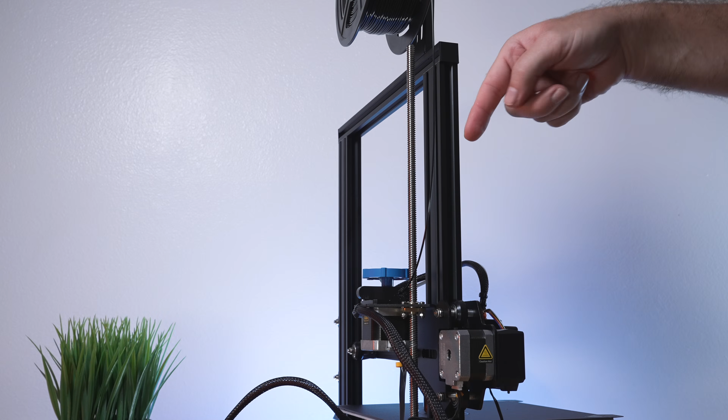Now for the other print here, this is actually printed in PETG, also in black, and this is a bracket for the spool holder. I got a little frustrated with the way the spool holder is on this printer, because the printer as a whole has everything updated and nice, except the spool holder is in the wrong spot. The reason I say that is if you guys notice how much of a turn it has to make - turn this thing super steeply 90 degrees right at the end, and it's really rubbing on the extruder.

And if we zoom in here, you guys can probably see we got a lot of shavings all around there, and even though it's metal, it must still have some kind of sharp edges in there that's just shaving the filament as it feeds in because of this crazy 90-degree angle.

So to fix that, we printed this bracket here, which is a side spool mount, and it is still stuck to the bed, printed in PETG at 230 degrees. So let's go ahead and pry it off - look at that, it comes off super simple. Again, I really love this build plate.

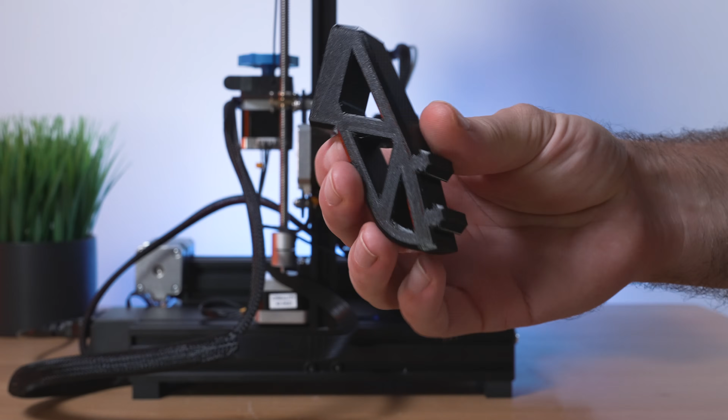There's a lot of options and different kinds that are similar. This is just what I had from before, and it works pretty well. But if you go to Thingiverse, you can find quite a few different options. What I like about this one is that we can just slide it in without any more hardware required, and then our existing spool holder will mount here using the same hardware.

So let's go ahead and remove it. We're going to take off these little T-nuts because we'll be reusing them in this bracket. They should fit right in there. And now we're gonna connect our original bracket to that.

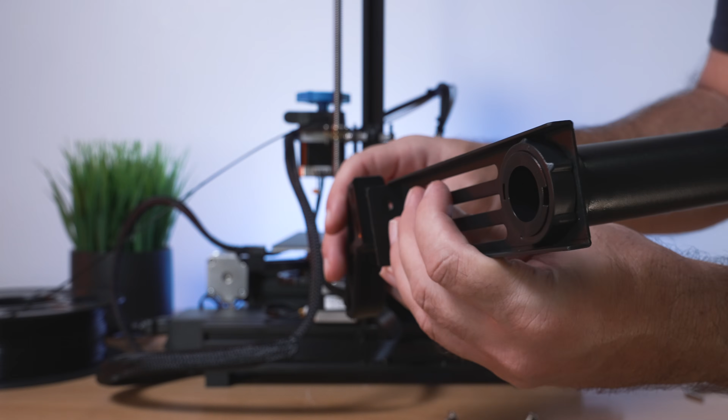This could get a little finicky, but it's not too bad. So I got one started, and we'll do the other one. Now we're just gonna snug them up just like that. If we look at the back of the printer, we can see there's a little end cap here that we need to pop off. This might not pop off too easy, but it does come off eventually.

Then we're gonna take our new spool holder upgrade and slide it into these grooves here, and just like that. You guys can see it can move around on the channel, and seems to be working pretty well. So let's put the cap back on, and now we have our new spool holder on the side, and our spool fits perfectly right there.

Now one thing you probably want to do is get these wires behind the spool holder, which we can probably squeeze over here. The reason we want them behind it is so the spool holder itself kind of holds them away from the spool.

So now we modified our printer to have the spool holder on the side, which feeds straight into the extruder and doesn't rub so hard against the arm where it snags and eats up the filament. This is a simple upgrade you can print out, and I'll leave some links for the side spool bracket. But keep in mind, one like this that free-flows or hangs with a lot of tension on it, you probably want to print in PETG or ABS.

But they do have the kind where the stress is relieved as it touches the bottom, and those you could probably print in PLA. So I guess we'll move our plant to this side, put our tools back, and we're ready to go back to printing. I'm going to print a few more things out, and then we'll take a closer look at those prints and also my final thoughts.

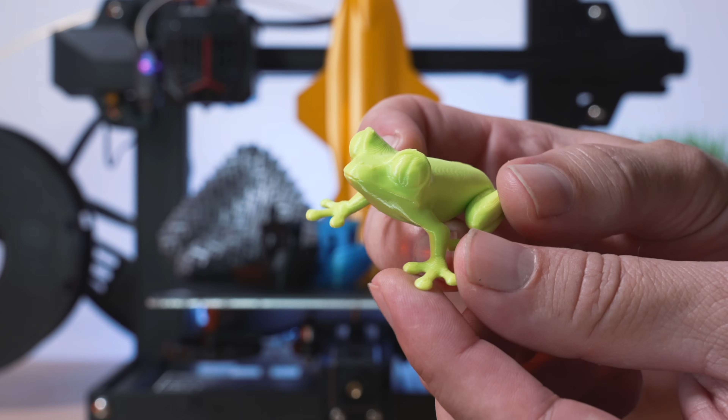It is in this light color, which is a little harder to see, but hopefully you guys can see. Our Z-seam is on top, but if we look at the sides and the reflections, the layers went down really nice. This printer puts the layers down beautifully. It's quite important that everything is adjusted well for it to do this good. If we look at the little paws here, everything is very accurate and looks beautiful. Not much stringing there at all. Great little print here.

Another print I like to print, which really tests out the accuracy of the printer and how the layers go down, is this gear here. This is a functional print, and I was pretty impressed that it turned out perfect, and it just spins right out of the printer. I did have to break it just a little bit, but after that it's smooth. This is probably one of the more accurate ones I've seen in a while. There is some play in it, but it's so minor, and it's perfect, literally.

Excellent job here with a functional print like this that requires great tolerances, and also all these pieces are printed individually, and the bed has been working great. Prints stick and then pop off when it cools off.

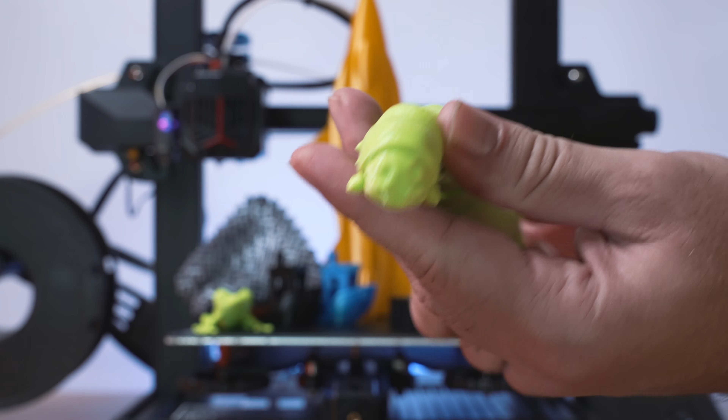So here we have a millipede, and this is a pretty cool print because it consists of all these pieces that have to combine. There's a lot of printing and retracting, and nothing can break loose. As you guys can see, there were no issues whatsoever, and this print looks excellent. This is a really fun one, especially for the kids. It kind of wiggles around and goes into any shape. So if you want to print things like this, the Version 2 Neo does an excellent job sticking to the bed and then just popping right off.

Now, I did forget to say that everything was printed at 0.2 layer height, 200 on the nozzle, and 60 on the bed, at 50 millimeters a second. So yeah, great print, very happy with that one.

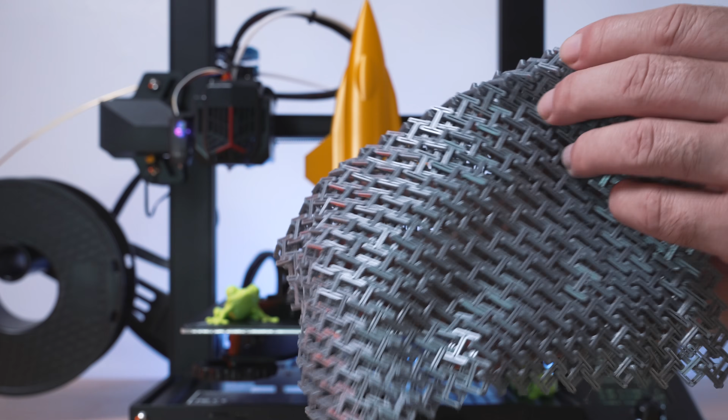So the next one is this chainmail, and this is really impressive because this is my first time printing something like this, and it requires a lot of retractions, guys. You can imagine how much it has to move a little, then retract, print, and move a little more, retract—it's constantly retracting. There's a lot of things that can go wrong here, like it could pop off, or the nozzle could knock one of the pieces off, things like that.

So this is a really good test of how everything works together, and you can get something like this with 3D printing, which almost feels like a rag—but it's a chainmail, and it kind of flexes in many ways, a square pretty much. So if we look at it closer here, guys, you can see the quality of the print.

Very nice, and yeah, very impressive. So if you want to print stuff like this, you could easily do it with this printer also.

The last print we have here is a rocket plane, printed in spiralized mode. So we got a few layers on the bottom and then one layer all around to the top, and this is the full 250 millimeters tall, and it is still stuck to the bed.

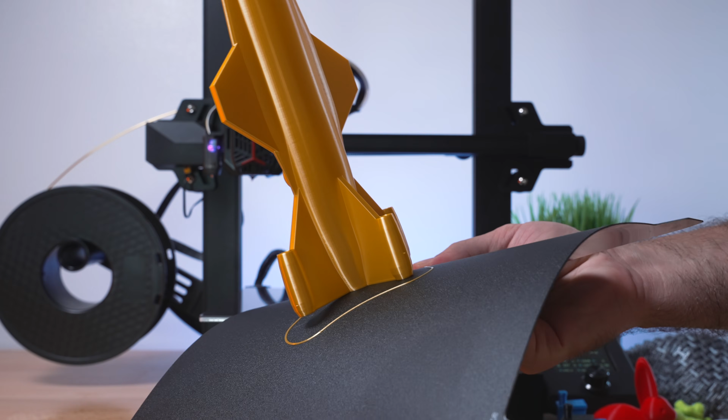We're going to have to flex it off because it's stuck pretty well, and prints like these are pretty fragile, so let's see how well we can just pry it off. I'm just going to flex it, and sure enough, it breaks loose pretty easily, and it should just peel off.

Yeah guys, again, I love this build plate. It works perfectly, and all the prints seem to stick very nicely, and it's quite easy to pull them off by just flexing the build plate.

Alright, so yeah, this thing turned out excellent. The bottom looks great. Look at those walls, guys. That's pretty much perfection right there. Very minimal ringing, no artifacts, just a beautiful print.

We do have a little bit of blobbing here and there, but it's pretty minor. There's a couple here, not too sure what that was, but yeah, other than that you guys can judge, this thing is just excellent. But it's not all perfect.

As we got to the top, you guys can see we had some kind of issue here. There's some layering here and there, so this must have something to do with either some binding, or maybe our PTFE tubing here was catching on one of these zip ties. I think that's what was going on, because one of these was more towards the middle and I moved it kind of back, and it was sticking up like this, and I didn't notice it till later, and when it got to the top it was catching on it. So I think that's probably what these layer lines were.

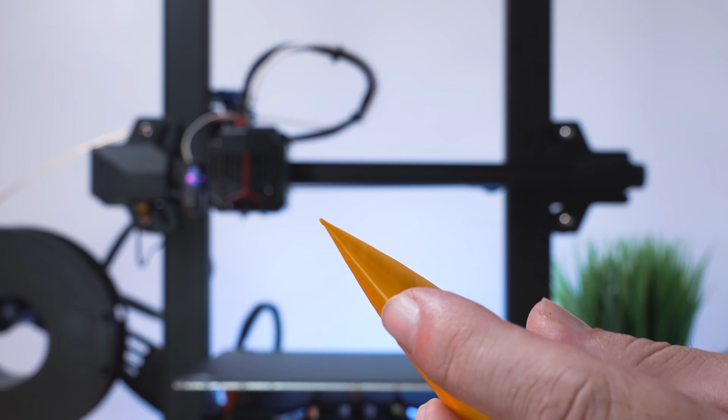But yeah, even going to the tip there, you guys can see cooling is great, nothing melted, and it did a perfect job, which honestly, I wish I could say I'm impressed, and I normally would be, but this is a Creality printer, and I've printed many things with Creality machines, and most of the time I had great or excellent results. So yeah, as you guys can see, I'm a pretty big fan of this thing.

I feel like because the Ender-3 from its original form was such a good building block, it still lives on many years later in all these little iterations and upgrades.

One of the things that the Neo really addresses is the auto bed leveling with the CR Touch. If you're the kind of person that can't get your bed perfectly, this really makes it easy, as all you got to do is click leveling and it'll reprobe it.

Now I still wish that they implemented a better software for manual leveling, as that part is still confusing, especially for someone that's new to 3D printers. But other than that, this is a very familiar UI, great screen, and we do have a preview of what you're printing before you start it.

Nice clean channels on the front, adjustable belts on X and Y, all metal extruder with this really cool knob that's quite useful, CR Touch, all new heat break, and this cover also looks nice with this red accent. Great build volume at 220 by 220 by 250. Excellent little steel sheet build plate. Love the drawer down here to put your tools and extra parts.

You do have power loss resume, so if the power goes out, it can continue printing where it left off. Only thing we're really missing on this printer is the filament detector, which is not too big of a deal as long as you have pretty good filament. Also overall, this printer is quiet with the silent steppers, and all you gotta do is move that spool holder down with the bracket, and you pretty much got a perfect setup here.